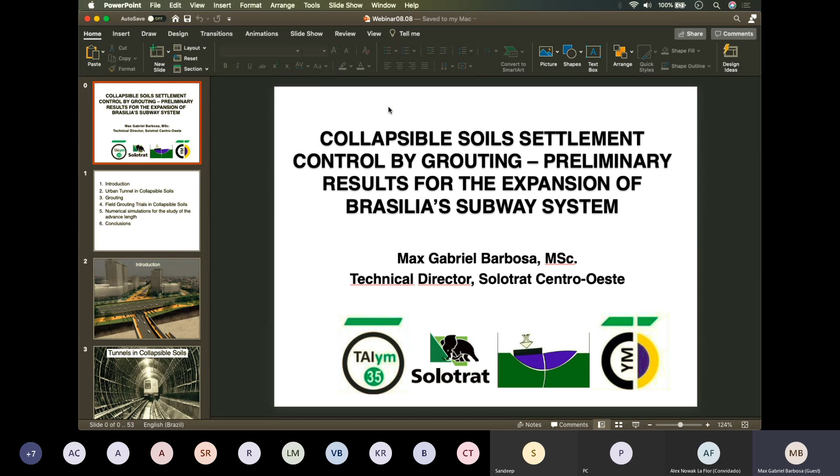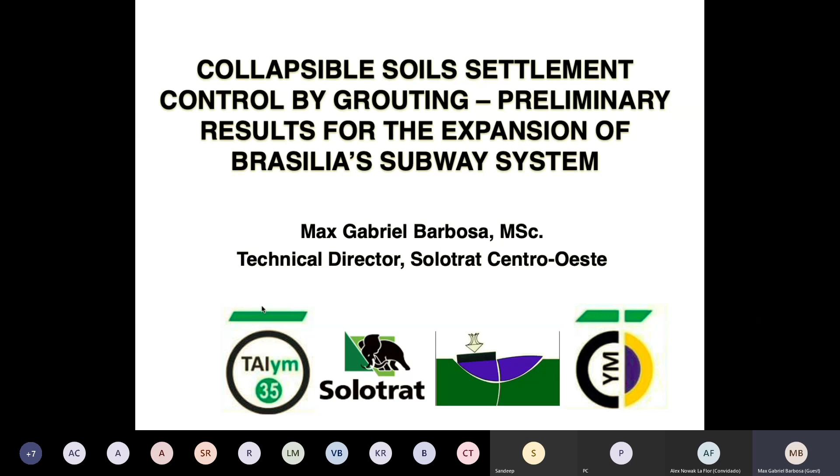The presentation is on collapsible soil settlement control by grouting, preliminary results for the expansion of Brasilia subway system. I'm Max Gabriel Barbosa, and together with the CBTym members, TAIym young members, Solotrat and the University of Brasilia, I'm presenting this talk today to you all. I will be available at the end of this presentation to answer any questions you have regarding this work and also grouting and tunnels.

This presentation is divided into 6 topics: a brief introduction, some aspects of urban tunneling in collapsible soils, some aspects of soil grouting, the field grouting trials we did in Brasilia in collapsible soils for this research, some numerical simulations for the study of the advance length, and finally some conclusions.

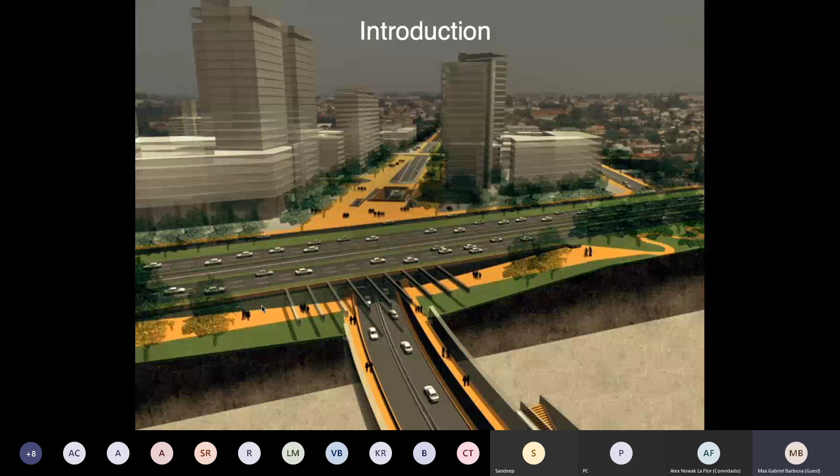As tunneling enthusiasts, we love tunnels and know how sustainable and essential they are for metropolises and crowded cities. They preserve the surface and the environment, allowing cities to integrate underground while the surface is reserved for nobler purposes like parks and recreation. So we are very interested in building underground.

In Brasilia, we have a subway system, not a very big one, and we will expand it in 2021-2022 to integrate more of our underground network. Here in Brasilia, an interesting fact is that we have heritage status by UNESCO. It's something I'm very proud of, but it also presents challenges and opportunities for underground work, since the surface is very expensive here. So why not build underground?

Tunnels in collapsible soils are very common here in Brasilia because that's our soil. Collapsible soils are quite similar to loess and aeolian soil, but here we have a different kind of problem. It's quite the same structure - a structured soil with high influence of suction - and we can only model this soil using unsaturated soil mechanics and more advanced models.

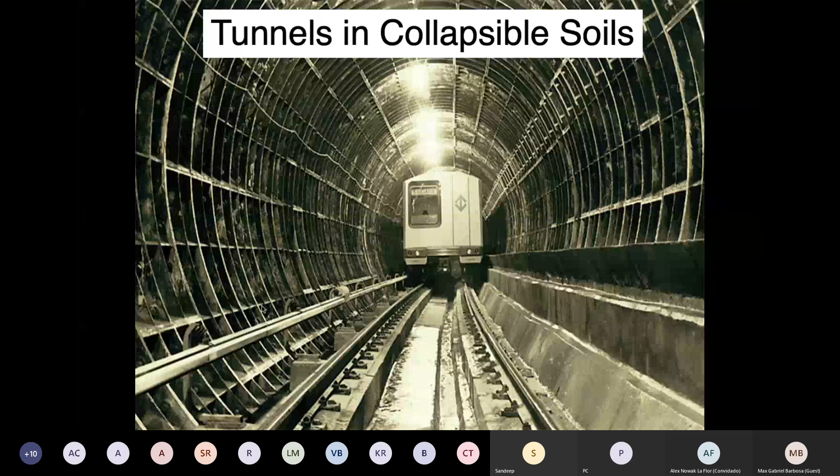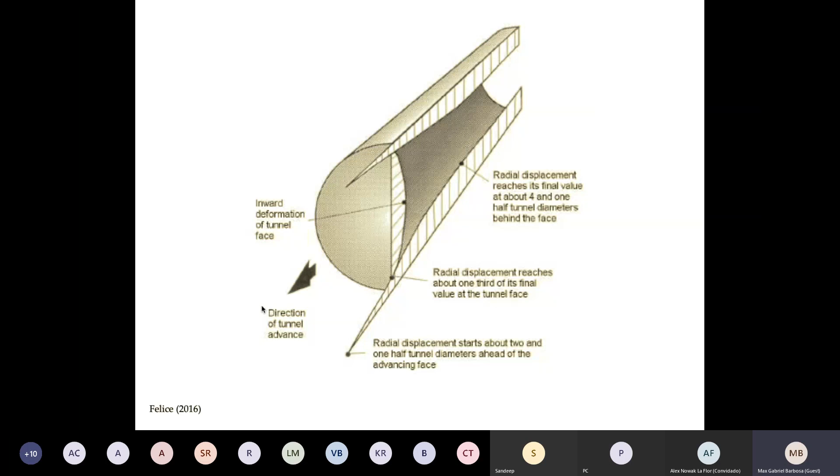Just as a reminder, the most probable behavior of the tunnel face and radial displacement correlates with the direction of tunnel advance, with minimal displacement starting about 2.5 tunnel diameters ahead of the tunnel face, the inward deformation of the tunnel face, and the radial displacement, as described in the design and construction of tunnels by Pietro Lunardi. This is much more explained and very useful for us tunnel engineers.

So when excavating a tunnel, we deconfine it a lot, mainly because the soil doesn't have the strength properties required to excavate a tunnel of, let's say, 6 meter diameter. So we have a collapse.

As I said, the Brazilian soil is a structured soil, like a card castle. When you rupture one card - let's say one bridge, one clay bridge as we call it here - when one bridge collapses, all the castle falls. One card collapses, all the card castle falls.

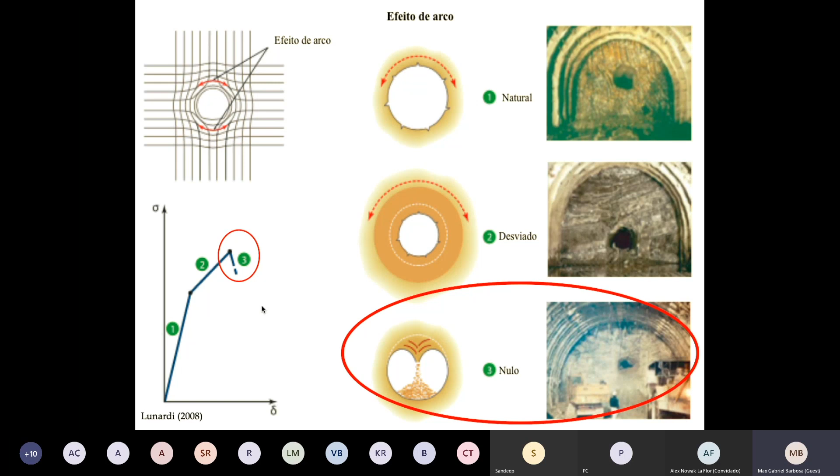Here in Brasilia, it's quite similar. The shrinkage is very high in this collapsible soil, as in loess soils as well. So we need to avoid this situation of a null arch effect. We have to build an artificial arch effect in order for the tunnel to be constructed.

This can be done by conservative solutions. Here we can see a conservative line, which enables the state of stress to stay below the characteristic line of the soil, the C and Phi line. Of course it can be much more complicated, but basically conservative solutions avoid the confining pressure going to zero, which would create a state of stress the soil cannot support, resulting in a collapse that can have tragic proportions.

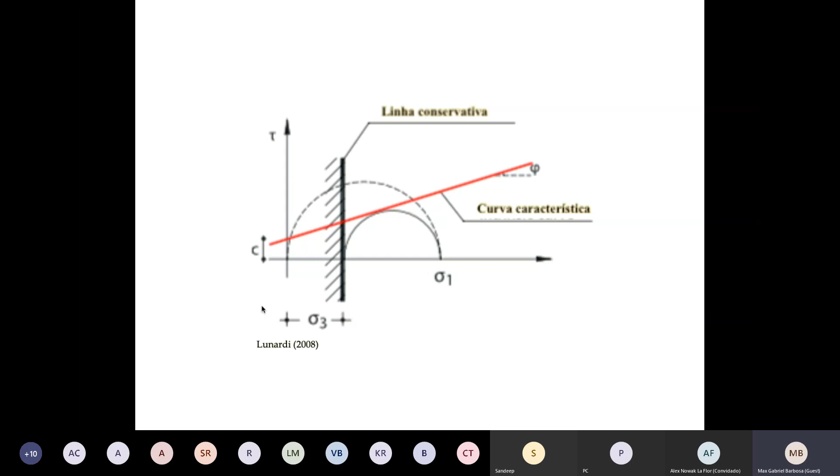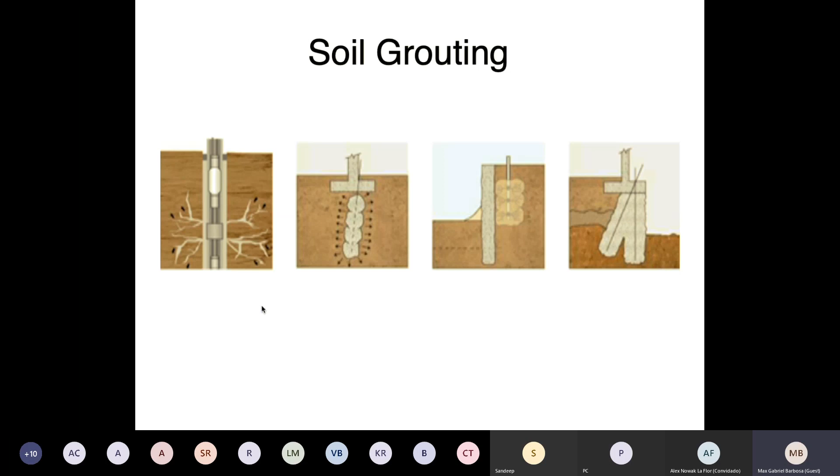For creating this conservative line, this improvement, and this artificial arch effect, we can use soil grouting - fracture grouting, compaction grouting, permeation grouting, jet grouting. There are a lot of soil improvement methods, but I will mainly present about cement grout of soil.

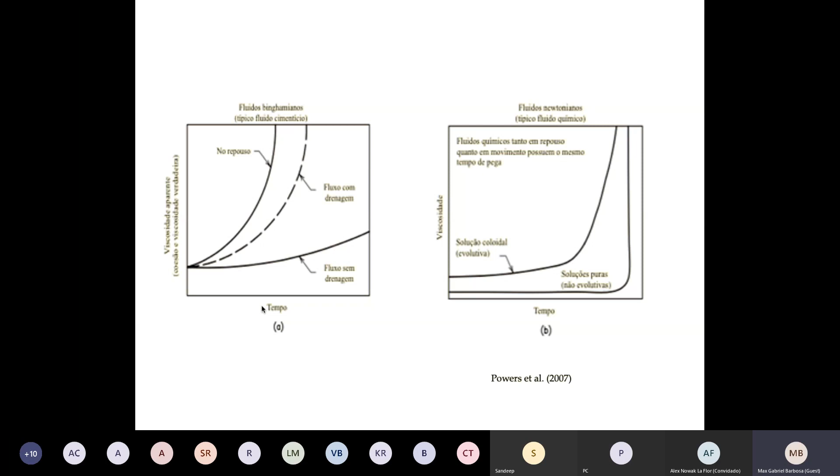We have to remember that cement grout is a Binghamian fluid, so it has cohesion. It's not like water, silicates, or resins, which are Newtonian fluids that don't have cohesion and shear resistance. This is important in the design of these grouting solutions.

The most famous, the most versatile, and maybe most famous here in Brazil, is the Tube-à-manchette technique, first invented by Ischy, a French engineer, who worked for Soletanche.

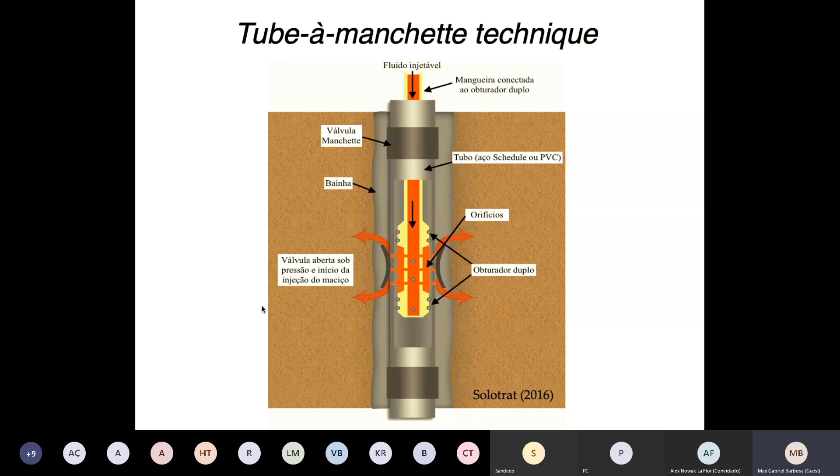This technique consists of drilling a hole, inserting a tube with spaced valves, grouting the tube to the ground, and later, after the grout hardens, injecting grout under pressure in the valves in order to densify the soil and enhance the mechanical properties. So we can have not only a conservative effect of avoiding decompression of the soil, but also improve the characteristic line of the soil, the C and Phi line, by using a technique like Tube-à-manchette or jet grout.

Tube-à-manchette is the most versatile technique because it can perform permeation grouting, which is a technique that doesn't alter the structure of the soil, just permeates the pores. It uses very low pressures, but has the limitation of pore size.

In Brasilia, we intended to perform trials to understand the main behavior of Tube-à-manchette here, but permeation grouting was one of the techniques we believed wouldn't work, since although we have a porous clay, this structured clay is very porous with permeabilities near fine sand. It wouldn't be enough to permeate the soil with grout, maybe only with silicates, which are very expensive.

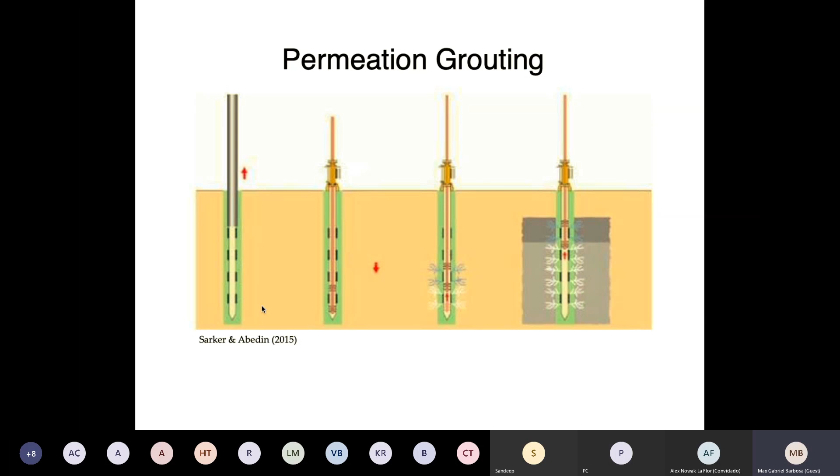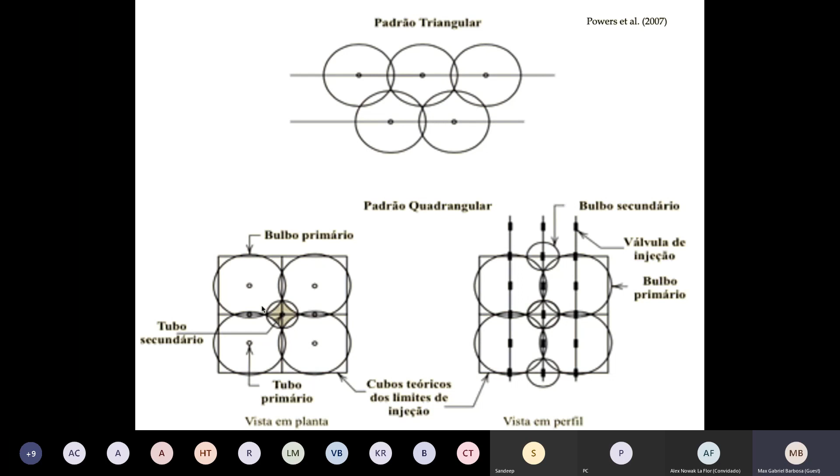We can use not only permeation grouting, but also compaction grouting and fracture grouting. We have two main patterns to arrange these injections: the triangular pattern and the squared pattern, and we have to calculate the radius of influence of each injection.

When we perform grouting works, we first estimate what improvement the soil needs, so we have a target value of improvement. For example, I want my effective cohesion to increase from 10 to 30 kPa, or I want to improve my equivalent friction angle from 20 to 30 degrees.

And finally, we have fracture grouting. I believe it's the most known technique by the tunneling community, because Lord Mair used it in the 80s and 90s in the Jubilee Line extension in London.

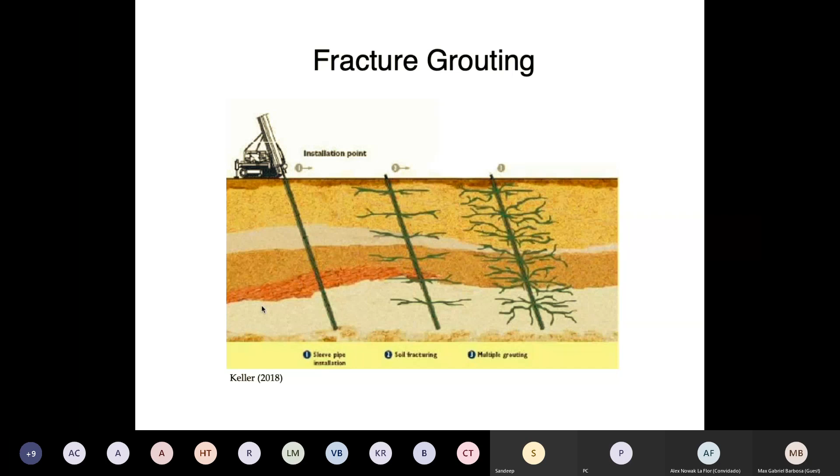It works for compensation grouting, where we can provide very high pressures which displace the soil, creating lenses of grout in all the treated area, enhancing the volume, raising the volume of the area of interest, and also raising the surface. So instead of surface settlements, we have surface uplift.

In many cases where tunneling creates surface settlement, compensation grouting can be used to compensate for the settlement. But it's a technique that requires very specialized people, and it worked well in the Jubilee Line mainly because there we had a clay that worked well with compensation grouting in London, but in other places in the world it doesn't.

Some places it works, some places it doesn't. Everyone needs to perform tests and field trials before the start of the works to see if it will really work. I believe Professor Adam Bezuijen today is the leading expert in compensation grouting.

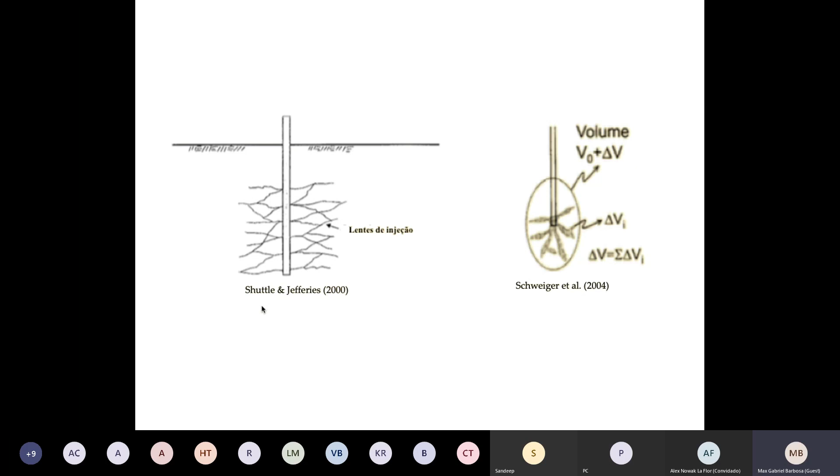And finally, we have compaction grouting. I don't know if you are familiar with this technique. In the US, they don't use the Tube-à-manchette.

Here in Brazil, we do compaction grouting with Tube-à-manchette, but in the US, instead of stiff cement grouts, they inject concrete. It's mainly used to raise slabs and pavements with very high pressures, but at a slow rate, mainly in granular soils, creating a balloon-like bulb that displaces the soil, with a similar effect to compensation grouting, but more indicated for granular soils.

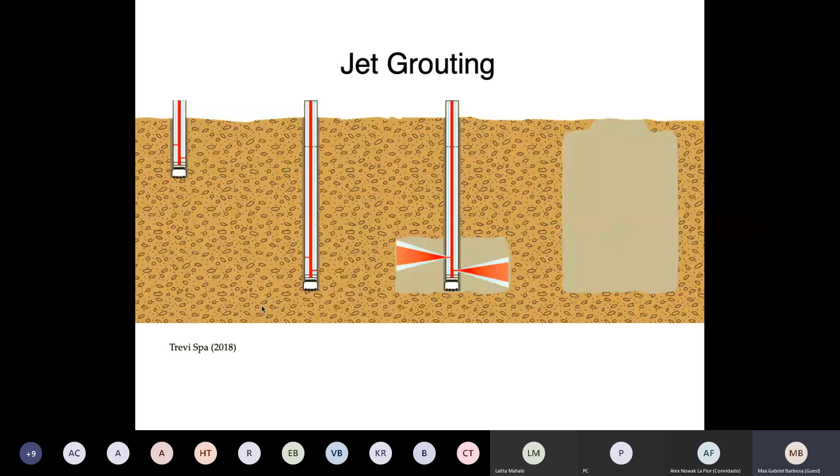Finally, the technique which doesn't use Tube-à-manchette is jet grouting, a very famous technique. We have pipe umbrellas utilizing jet grouting, but it's a very capital-intensive technique with huge machinery and silos, and it needs more capital. So when we have time to plan and build ahead, Tube-à-manchette becomes a more cost-effective solution, and that's why we chose this technique to perform the field trials and observe the improvement in the soil, and how this expansion of the subway system could be performed with greater success and without such huge surface settlements.

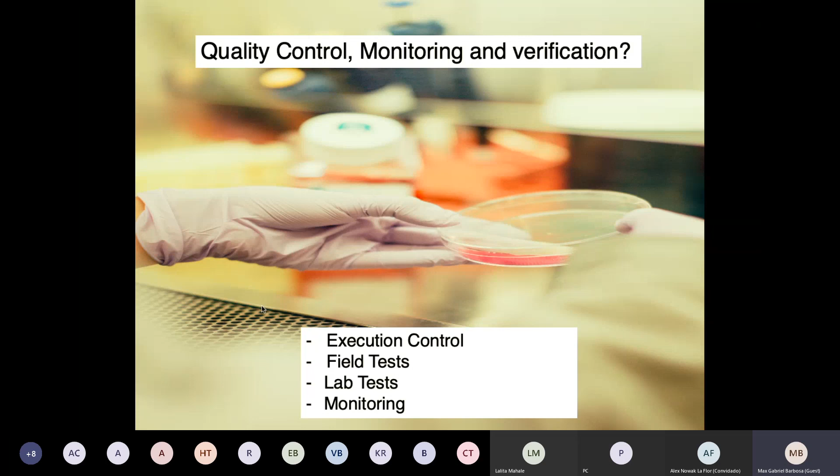For these field trials, these works of Tube-à-manchette grouting, we utilized QC, QA, and verifications with execution control, field tests, lab tests, and monitoring of the surface to observe surface lift, surface heave, and aspects of the grout as well.

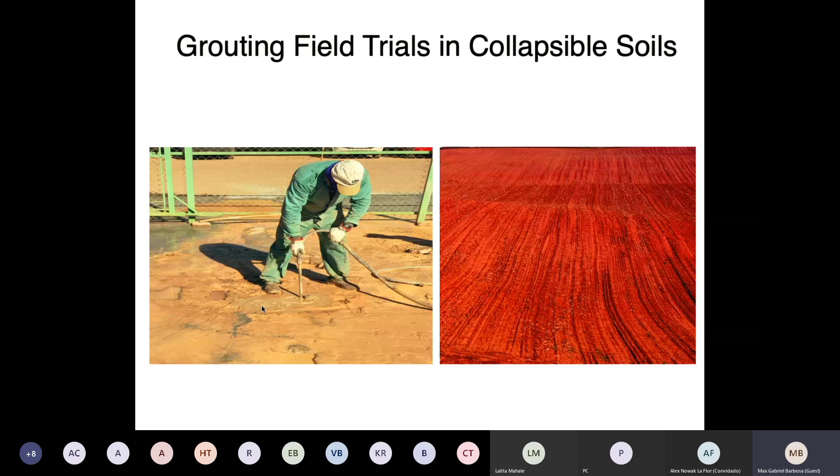This grouting was made in an experimental field of Solotrat, where we can see this reddish soil, characteristic of a lot of iron presence in the soil, hematite, and we can also see a professional grouter.

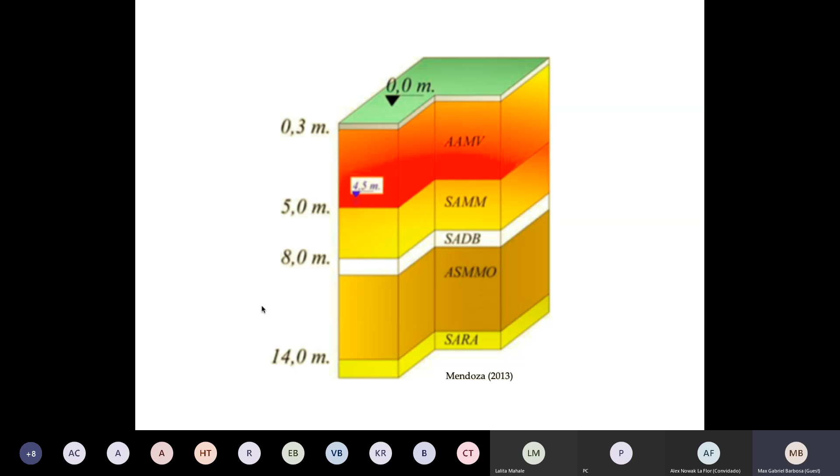This experimental field was characterized in 2013 with Mendoza, who performed triaxial tests, CPT tests, and SPT tests. As you can see, in the first 5 meters the soil is the typical porous clay of Brasilia, the same one found in the expansion of the subway metro and in the construction of the subway in the 1990s in Brasilia. Since it was similar and accessible, and had already been characterized, we utilized this experimental field, since the Brasilia subway couldn't make an area available, and the cost would be astronomically higher performing this trial there, among buildings and people. So we opted for this similar experimental field.

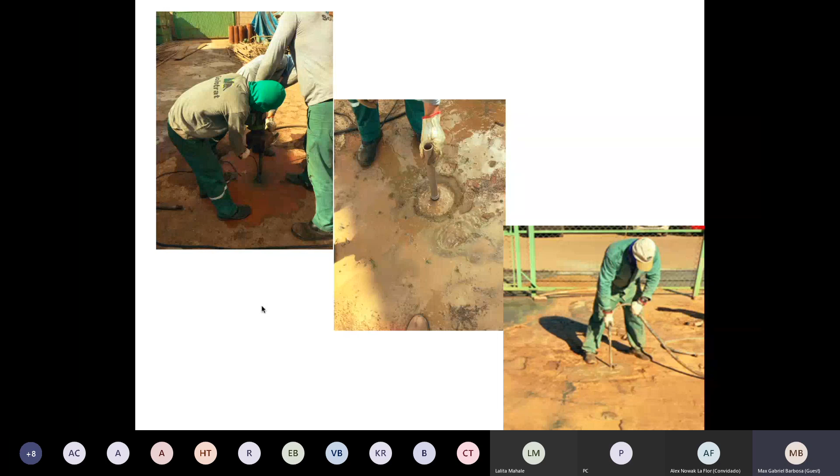Here we can see preliminary tests where holes were drilled, and we were trying to assess the most effective volume per valve injected. So here we tested with 0.5 and 1 bag of cement per valve. The first one, on the left-hand side, we utilized 0.5 meter spacing between valves and 1 bag of cement per valve.

In the second, we used just half a bag of cement per valve, with a water cement ratio of 0.5, a very commonly used ratio because it provides higher strength and fewer problems with exudation than some water cement ratios used mainly in the US, where ratios of 1 or 0.8 are used, very high ratios, but with problems with exudation.

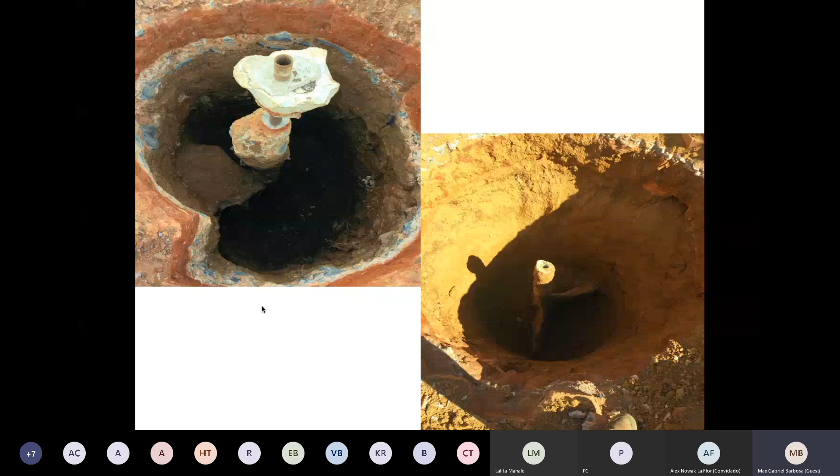So we decided on the left-hand side approach: 0.5 meter spacing between valves and one bag of cement with a water cement ratio of 0.5 per valve, because we could treat a bigger area and it would be more in line with our predictions.

In our field trials, we estimated a representative area. We did two circles with a mean spacing of 1 meter between holes, and a 3.5 meter depth for each grouting hole, with the 0.5 meter spacing between valves and one bag of cement per valve grouted. This gave us a representative area where we could extrapolate the results for the numerical simulations.

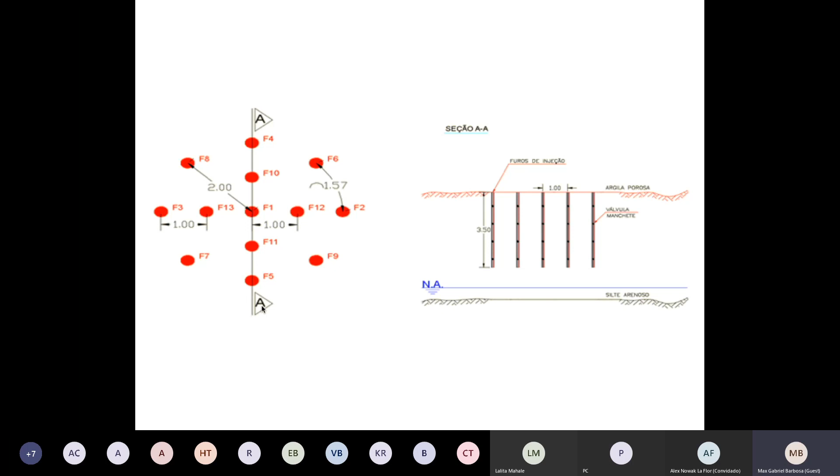We will see the improvement inside the circle, estimate it, and put it into our numerical simulations to observe the effects on the advance length of this grouting. What will happen when we grout the surface, these collapsible soils? That was the main question we were trying to answer.

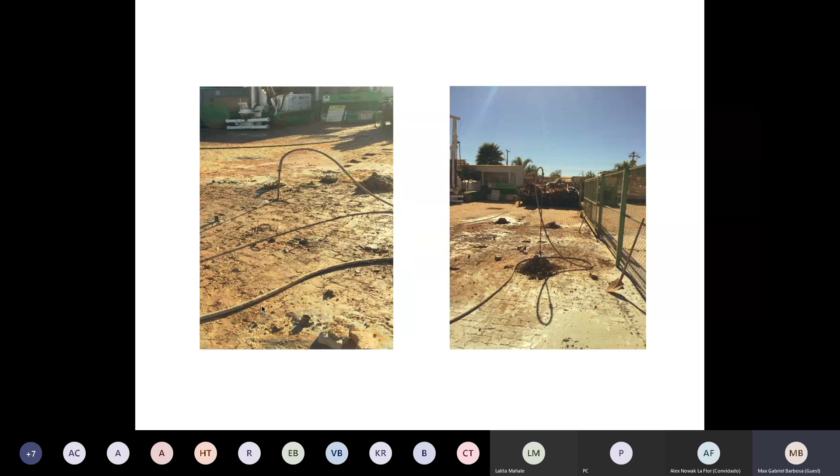Here are some photographs of the grouting works, the valve grouting. Here are some tests we performed to obtain the refusal pressure of the treatment.

We performed compressive strength tests at 1 day, because with the Tube-à-manchette technique, we install the tube, grout it to the ground, and then inject grout inside the tube, but this grout has to shatter and create little fractures in the sheath, which is the annular space between the ground and the tube. We fracture the sheath, and we need to know the compressive strength of the grouting at 1 day to size the pump and the agitators, because opening the valves can be very difficult if the tube stays installed and the grouting hardens for more than 7 days, for example.

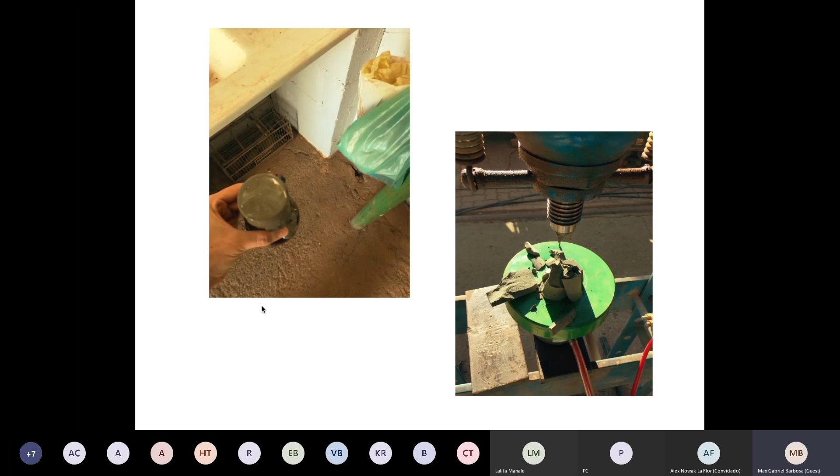So we have to be careful to grout the next day, so we can use more economic pumps and agitators for this grouting, and also achieve better healing of the sheath, so we can make this very little fracture in the sheath and fill it with grout after grouting.

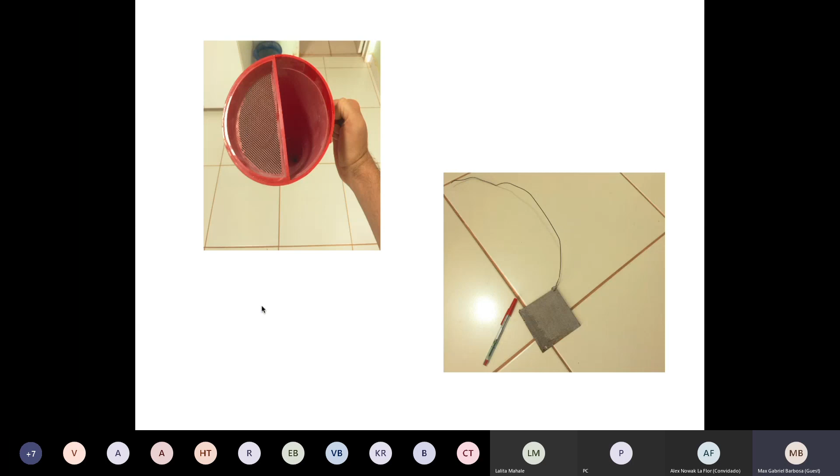We did Marsh funnel tests to assess the viscosity, and we did Lombardi plate tests to assess the cohesion of the grout. It's not presented here in these presentations, but it is possible to estimate the probable radius of influence of grouting by utilizing the viscosity and cohesion of the grout, the injection pressure, the grouting volume, etc. So these tests are important to confirm that our design assumptions are correct.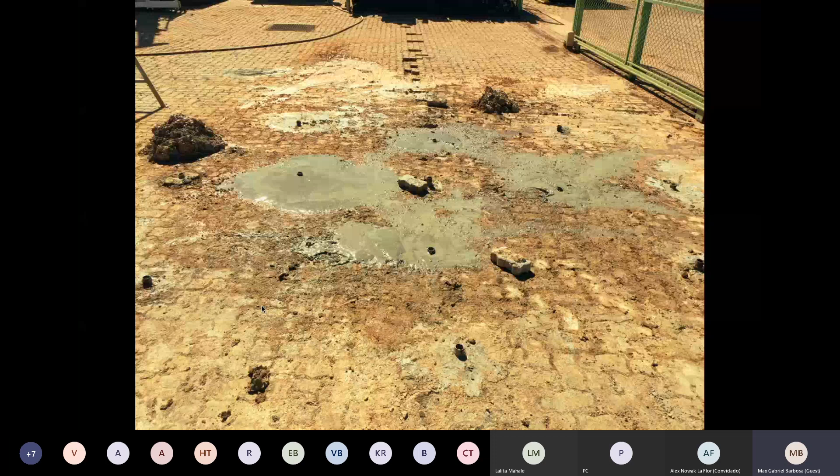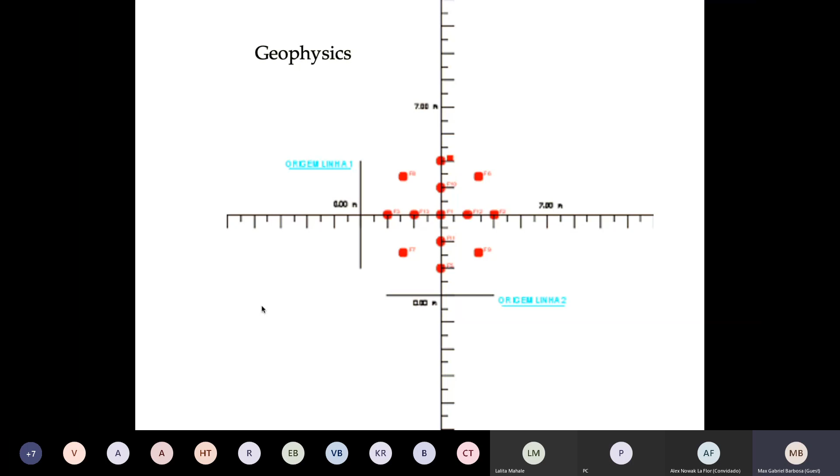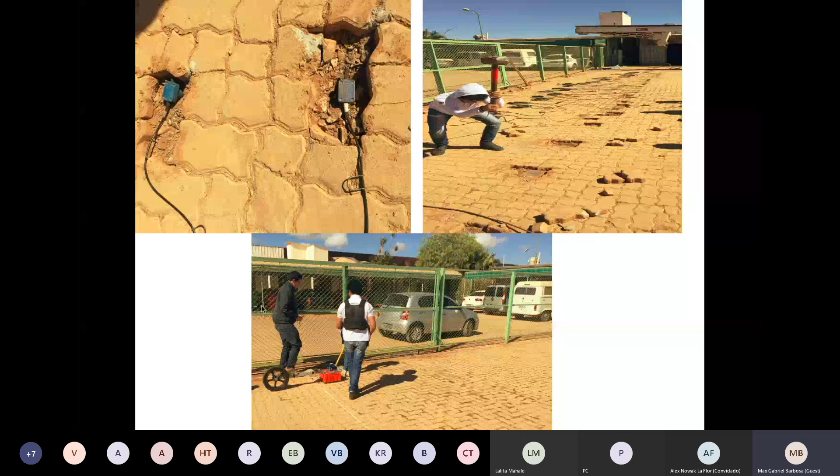We also did geophysics to assess the improvement of the soil, but because it was very shallow, the depth of treatment only 3.5 meters, although we did GPR there, we couldn't assess this improvement only by geophysics. So we performed the standard penetration test. It's a very easy test to perform, and we had these logs of the work by Mendoza in 2013.

So we did some tests in green. In red, we can see the arrangement of the grouting holes, and in green, we can see where the SPT tests would be performed. SPT1, 20 centimeters from F1; SPT2, 50 centimeters from F1 and 50 centimeters from F10; SPT3, 50 centimeters from F10 and 50 centimeters from F4; and SPT4, 1 meter from F4. We were expecting SPT2 and SPT3 to be representative of the results we would obtain in the field with the improvement expected.

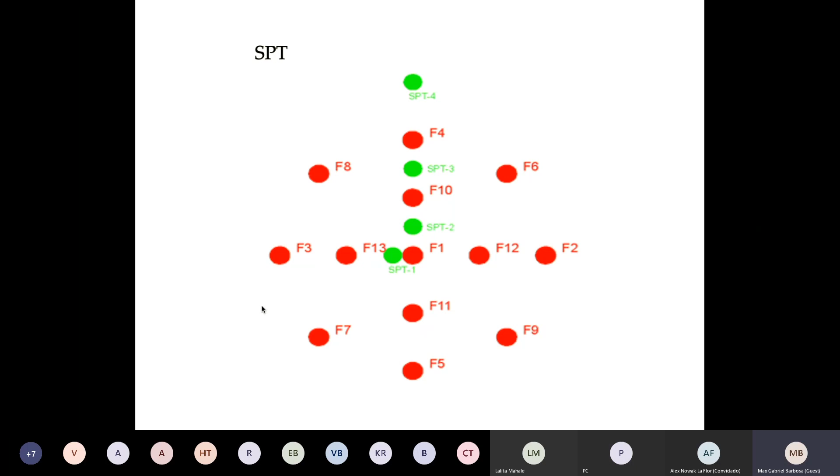Here we can see the performing of these tests, and later we exhumed the area, we excavated to see the behavior of this grouting, because as I said before, Tube-à-manchette, depending on the design parameters, can have a permeation effect, a compaction effect, or a fracturing effect.

Here it's very clear that we can see a bulb around some of the manchettes, and this bulb relates to what we call groutability of the soil. So where there is a higher void ratio, the grout goes.

So it is very interesting because when we do numerical simulations or design a tunnel, we usually assume that the soil is homogeneous, which is not the case. Even in a quite uniform soil as in Brasília, this collapsible soil, we can find discontinuities and places where the equivalent void ratio is lower than the global void ratio.

So here we can see this behavior of compaction grouting. And also we can see near this bulb a gray area. It's not because the soil is gray, the soil was red, but because of pressure filtration, a phenomenon where the pores of the soil are clogged and just water passes, and this water has this grayish color because of the cement.

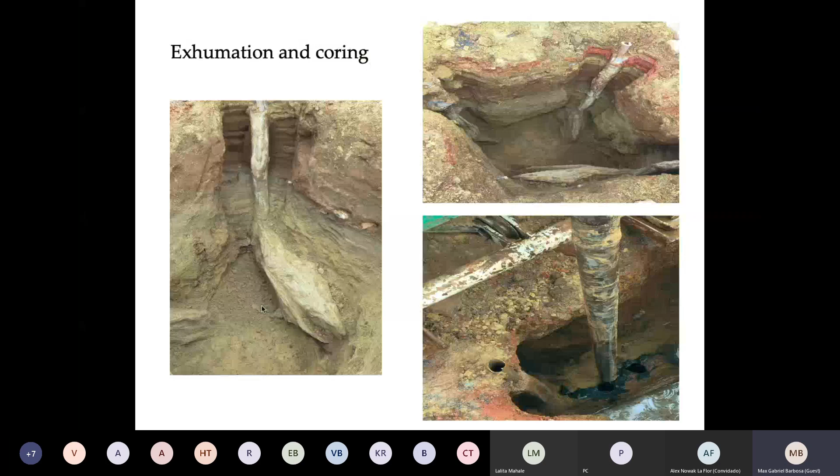We also did corings, as we can see on the right-hand side below. We did corings in these grout bulbs to assess their compressive strength and their mechanical properties regarding deformation. So we could assess the Young's modulus using this Humboldt machine, where we did unconfined compression tests with controlled rate of deformation and measurement of the final length of the samples.

This excavation and the coring were performed 90 days after the grouting. So we could see the quite long-term effect of the strength of the grout.

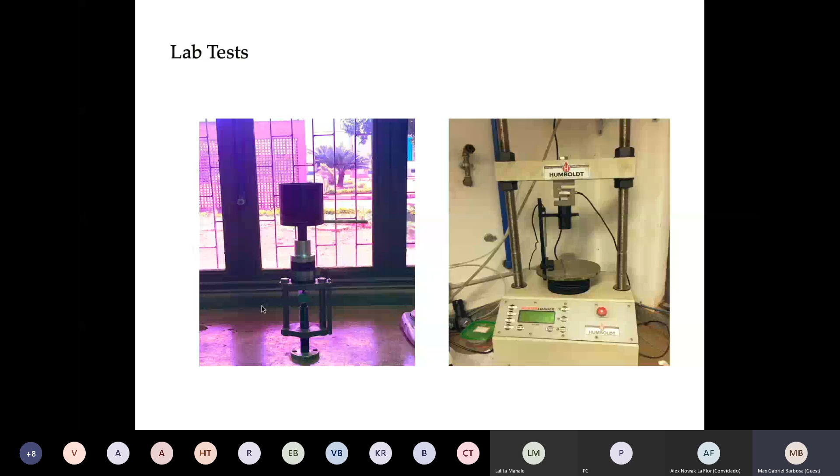On the left-hand side here is a point load test, a test we use a lot for rocks, which can also be used for grouting, and it correlates well with compressive strength, and is a quick and cheap test. We used that mainly to have parameters for future works in Brasília with this grouting. Here we can see the samples after they failed, after the test was done. We obtained these results, which are very useful for numerical simulations and also for future design.

We have here the grout properties when the grout is fluid: the water cement ratio I mentioned, and the maximum grouting pressure — I'm talking about the pressure injected into each valve, not the pressure required to open the valve, which was similar to the compressive strength of the sheath of the annular grout around the tube.

So that was the opening of the valve. It was that pressure, and then later we stabilized at maximum 800 kPa net pressure. We had a manometer and a pressure gauge near the tube to assess the real pressure being injected into each valve.

The maximum grouting volume per valve, as I said, was 1 cement bag, approximately 40 liters. The exudation was still high, 10%, but as we injected a lot, it was not that much of a problem.

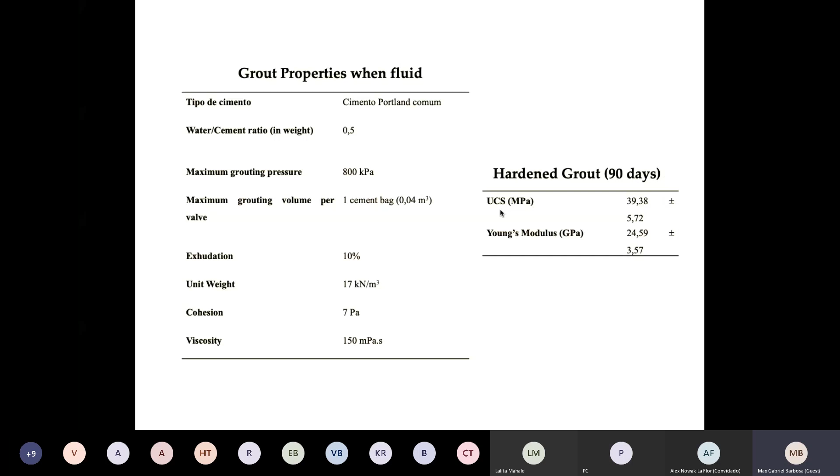The hardened grout had unconfined compressive strength between 35 to 40 megapascals, and the Young's modulus was 21 to 27 gigapascals. So it was expected, but even a little bit higher than expected.

We used this 44% in order to be more conservative. But when the expansions of Brasilia happen, the Brasília subway system, when we perform field trials there, we can be less conservative about this type of improvement.

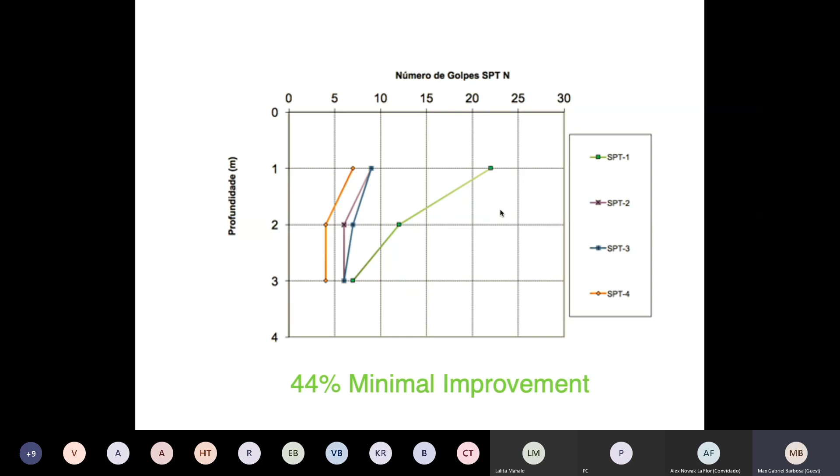So with these results, we did numeric simulations for the study of the advance length. We did a 3D model. As you can see here, it was estimated that all above the shallow tunnel was grouted because the tunnel was only 80 meters and the crown was only 8 meters below surface. So we considered that we treated all the collapsible soil above the crown.

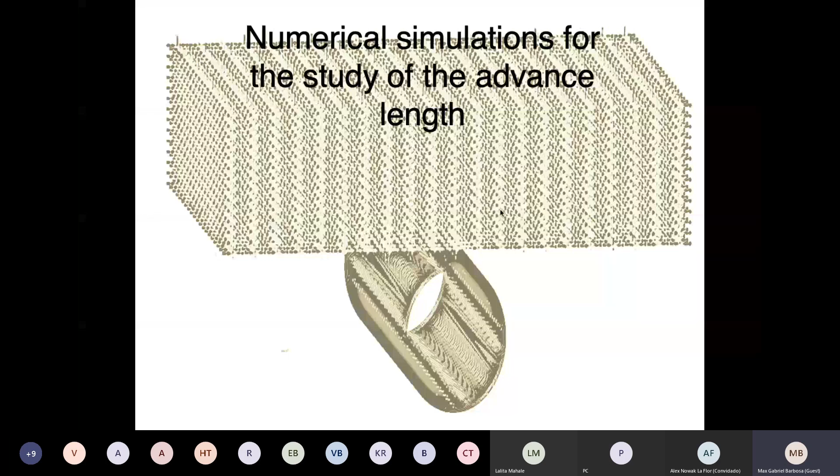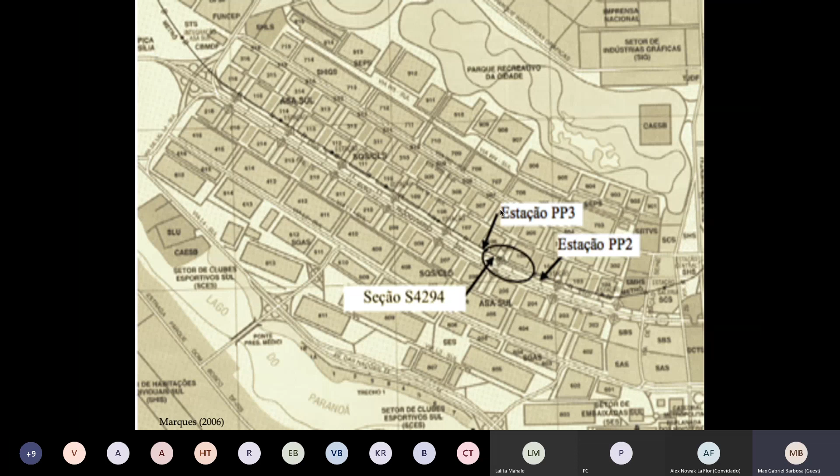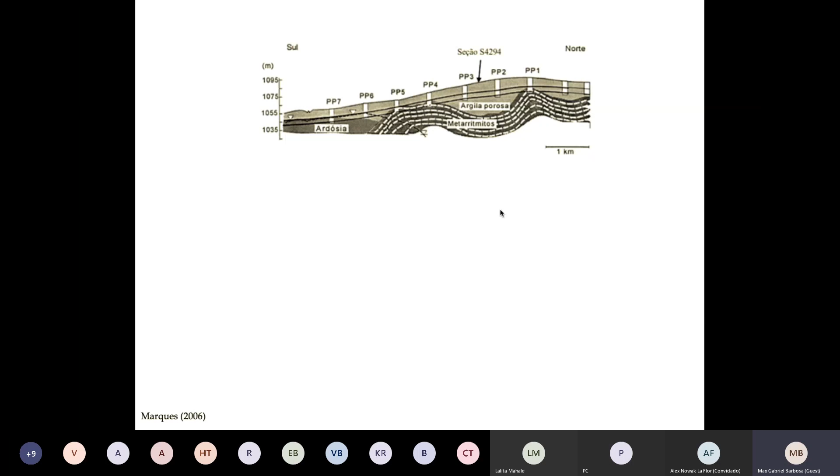And this section of the previous tunnel we used for the simulation to see what would be the settlement if grouting were used. This was section S4294, located between shafts PP2 and PP3, where we had the collapsible porous clay of Brasilia, as well as in the experimental field.

This work was based on the simulations made by Marques in 2006, and he estimated 5 layers. The first one here is in light green, the last one in dark green, and all of these layers were collapsible porous clay, but had different properties regarding strength because the confining pressure was higher in layer 5 than layer 1, so layer 5 has better properties than layer 1.

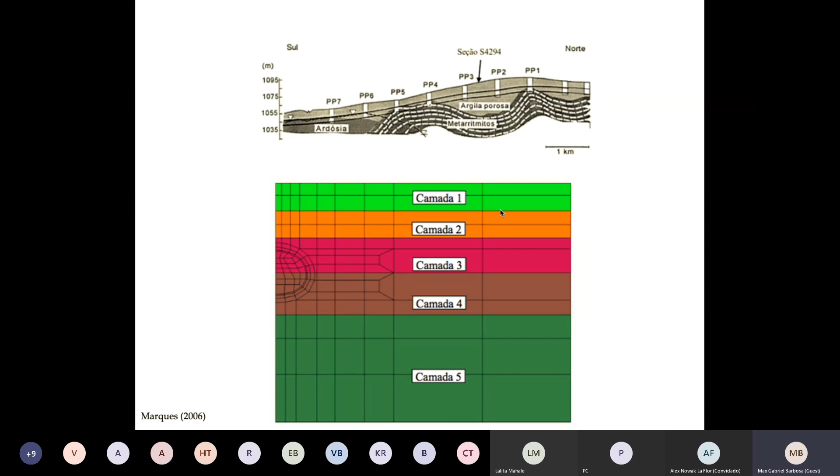This is, for those who perform simulations, the most expected profile of settlement, where we can see an extensometer: M1 is the surface, T1 is 5 meters below surface, and T2 is 7.5 meters below surface. So it is expected that T2 is higher than M1, the displacement nearer to the crown being higher than M1.

But in Brasilia, because of the collapsible nature of the soil, we have a higher M1, 170 millimeters, than T2, which was 150 millimeters. So it was inverted, the settlement profile here in Brasilia.

As you can see here, when we use Mohr-Coulomb for the simulations, the results were very different. With Mohr-Coulomb we would expect 110 millimeters, 11 centimeters. But when excavating the tunnel, it was 170 millimeters. So it was much higher.

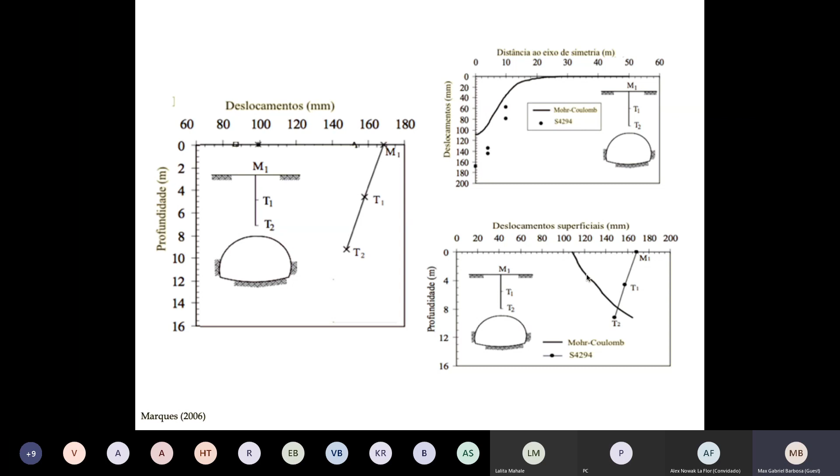And when we see the expected values for Mohr-Coulomb, we can see the inverted profile with M1 lower and T2 higher, but when excavating the tunnel, M1 was higher than T2 because of the collapsible nature of the soil. When the soil collapses in T2, it's like a card castle, so T1 and M1 magnify that collapse. So we have greater shrinkage, and consequently greater volume loss when excavating the soil.

Here was the sequential excavation method utilized. It wasn't with tunnel boring machines, since we hadn't had this technology in Brazil in the 1990s, and since it's a greenfield tunnel with not a lot of concern for buildings, it was built with the sequential excavation method and will be built with the sequential excavation method for the expansion, because it's much cheaper and we have more tolerance for the time frame than with tunnel boring machines.

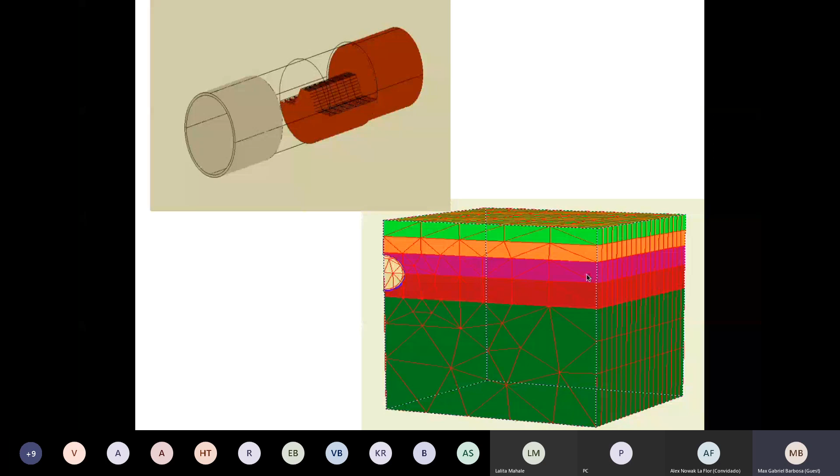We first calibrated our work with the work presented by Marques.

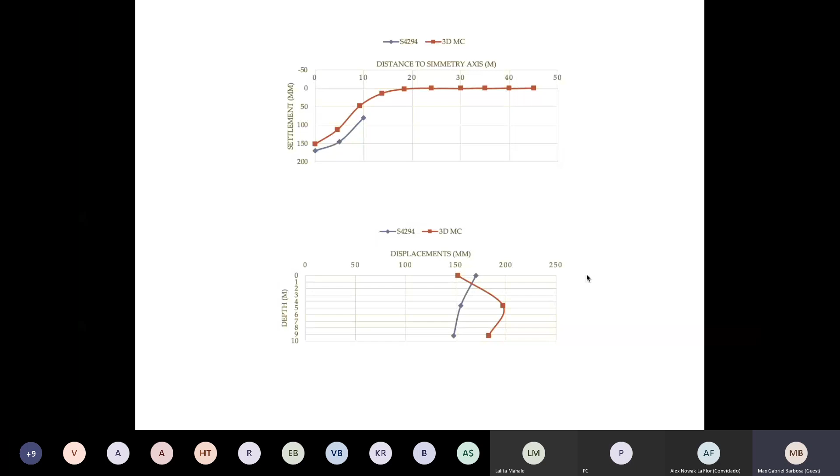As we can see here, our simulation is in red and the real settlements are in blue. The 3D Mohr Coulomb model couldn't capture well these displacements with depth in regard to the main axis, as we saw in the figures before.

But when we utilized the hardening soil method, with the hardening soil parameters, to model our collapsible soil, we almost found perfect agreement with the real results. In red, we can see the 3D hardening soil, and in blue, the actual results.

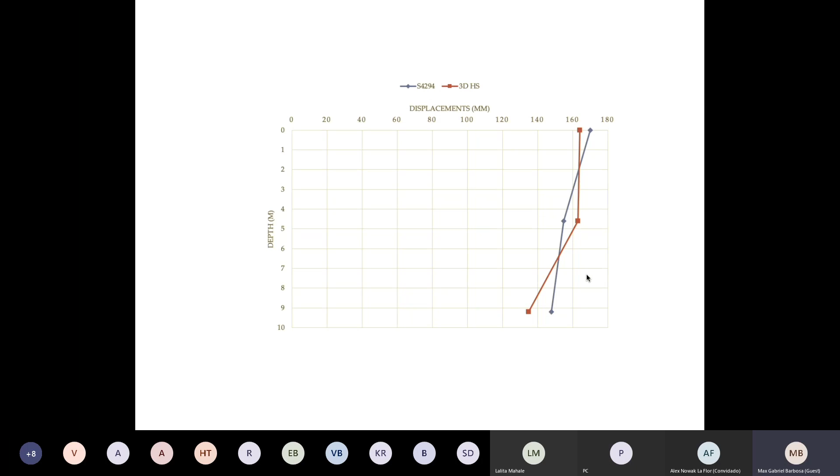So we calibrated our model well, and later we could implement our grouting. We used the parameters obtained in the field trials, utilizing the hypothesis of similarity of soils, because the characterization of the soil in section S42 and S4294 and the experimental field were very, very similar.

We utilized this Hoek's method implementation to simulate the grouting, using a mean expected rigidity value, since grouting is much more rigid than the soil. So we calculated the...

equivalent rigidity of the treated soil with grouting, because grouting not only increases the resistance and mechanical characteristics of the soil, but also makes it more stiff and rigid, since there are closely spaced holes with 1 meter between them. The equivalent rigidity of the soil becomes much greater, and this is very important to model when performing simulations to obtain displacement.

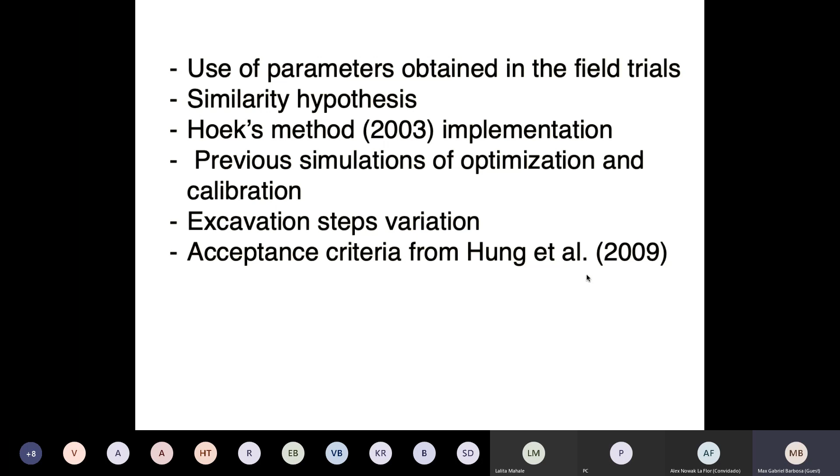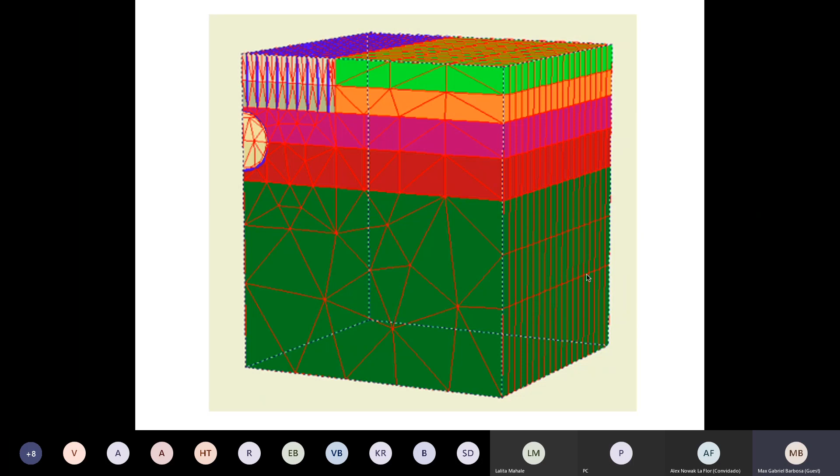So here are the results we obtained in our model for different advance lengths. With 2.4 meters advance length, which was used at the time of construction, we would only have 30 millimeters, just 3 centimeters of maximum settlement.

And with a 4-meter advance length, we would have 60 millimeters, so 6 centimeters of settlement, and this was the maximum amount of settlement allowed in our acceptance criteria of 1% volume loss.

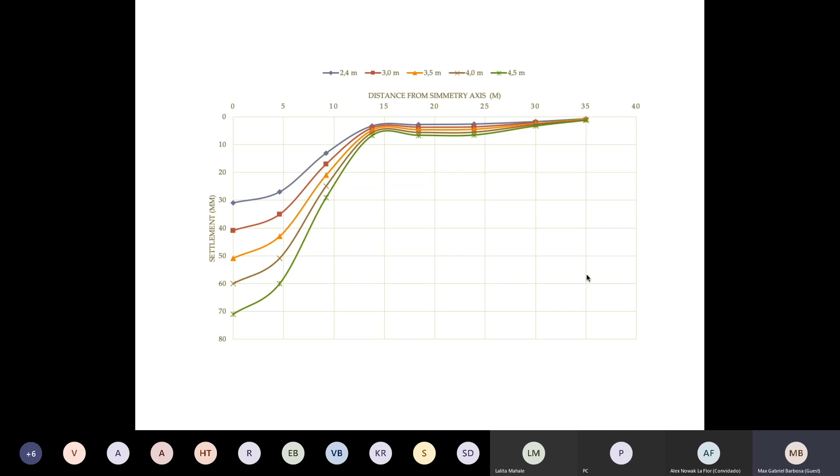So this brown curve represents better the expected settlement, the accepted settlement, and the probable advance length allowed. As we can see, we could have a 66.67% improvement of the advance length, improving from 2.4 meters to 4 meters, for a tunnel of 2.5 kilometers.

This would result in much less time. Considering 2.4 meters of advance length per day, we would have more than 1,000 days of work, and with 4.0 meters advance length, we would have 625 days of work. So it would be an expansion in much less time than the first expansion of the subway system.

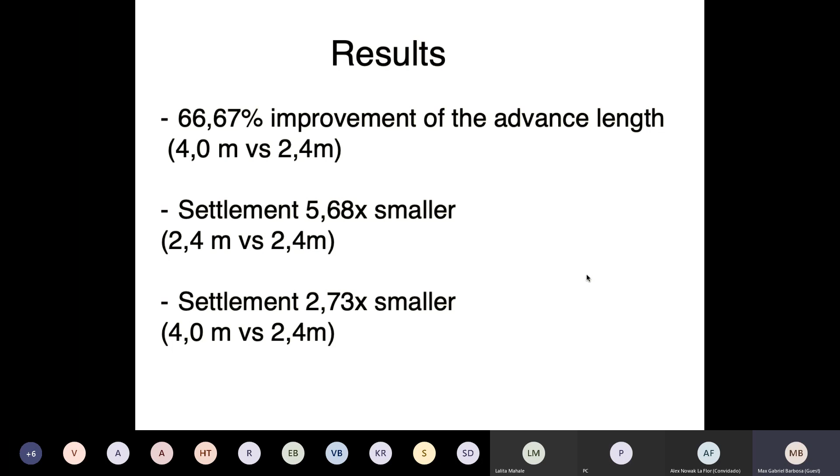The settlements were almost 6 times smaller when comparing the same advance length, and even with 4 meters, we had almost 3 times smaller settlements. So it really improved the performance and quality of our tunnel construction.

The main limitations, as you probably observed, were more qualitative than quantitative results, because we had to perform these field trials when works start. We need to see if 1.1 meter grouting really provides 44% improvement, or if we can be more bold and have 120% improvement. Or maybe we don't need a 4-meter advance length, maybe only 3.5 meters. Maybe we can increase the spacing between grouting holes to 1.5 meters. So these field trials are needed again.

We could model better in future works the possible collapse mechanism of the tunnel, because with grouting just above ground, we can have a different kind of mechanism than with the collapsible clay.

We could also vary the sequence of excavation and partialization of the face. That's something that will be done in the design of the subway system. The support rigidity could be lowered, because since we are having grouting above the support, the support can be thinner, as we now have less stress on it. Maybe we can vary the support rigidity and have a less expensive work or tunnel, since support is quite representative of the total cost of the tunnel job.

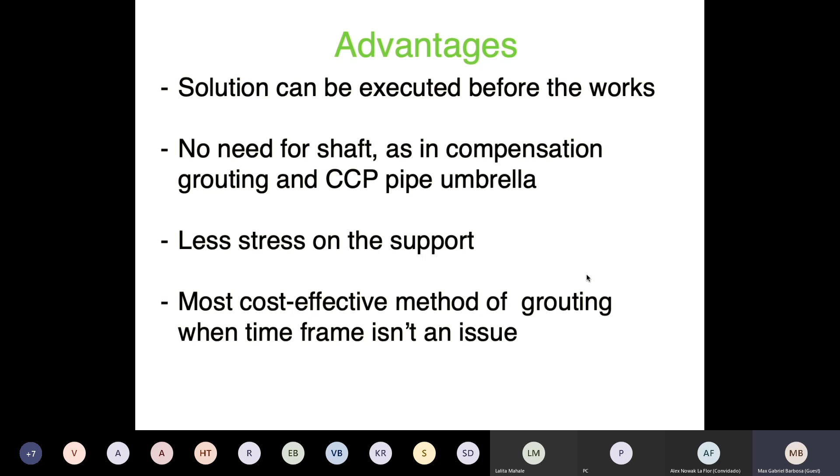So what we could conclude is that this methodology of performing field trials was very suitable for the next field trials for the Brasilia subway expansion, and we have very, very promising soil improvement results that can be replicated when the tunnel construction begins.